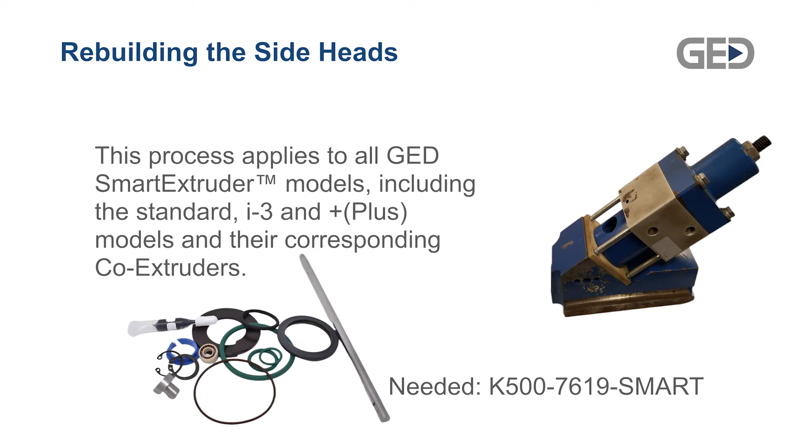Take down the COVID mask.

We're going to go ahead and rebuild the side heads. You're going to want to do this when they're hot. The material is too hard to clean up when it's cold. You're either going to take them right off the extruder and start to rebuild them right away, or have some sort of a mechanism to heat this up, a hot plate or something.

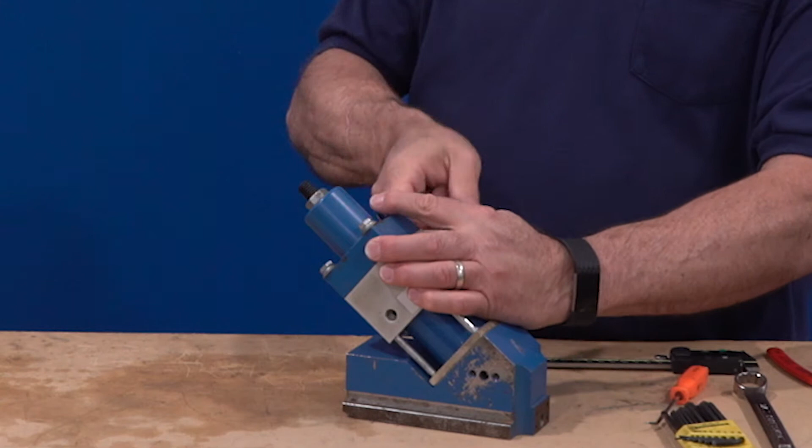It's kind of a hot, messy, sticky job. But when these seals down in here start leaking, and you start getting a ball in there about the size of a grape or a marble, it's time to replace the seals. Of course, keep in mind this is going to be about 200 degrees and hot and sticky. All right, we'll get our 4 corner bolts out.

And we pull the bell housing off. We're going to break loose the jam nut on the bell housing. And we're going to back the stop bolt out. I take it completely out. We're going to pull the air cylinder out, and I'll pull the nozzle adapter out. Just kind of twist and pull.

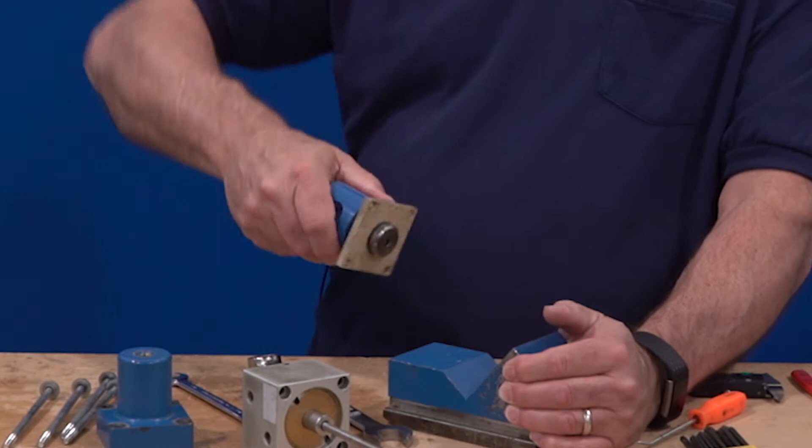When you go to replace the seals in here, it is not necessary every time to do a complete rebuild on the heads. What you could have are just the 6 components that make this up, sitting on the shelf. You could literally do this on the machine, pull this apart just like this, replace the stem seal, and put it back together.

While you have it apart, inspect the end of the stem to make sure there's no damage to it. Over time, it'll start to stick down into the seat. We just want to be careful that we're not getting a ring around here where it is getting stuck in the seat. But these 6 components are the nozzle adapter itself, the insulator, the O-ring, there's a snap ring, stem seal retainer, and stem seal down inside here.

Get the cheater glasses so I can see. That might help things out just a little bit. Yeah, this snap ring's been in and out a few times, seen better days. Used for demonstration purposes.

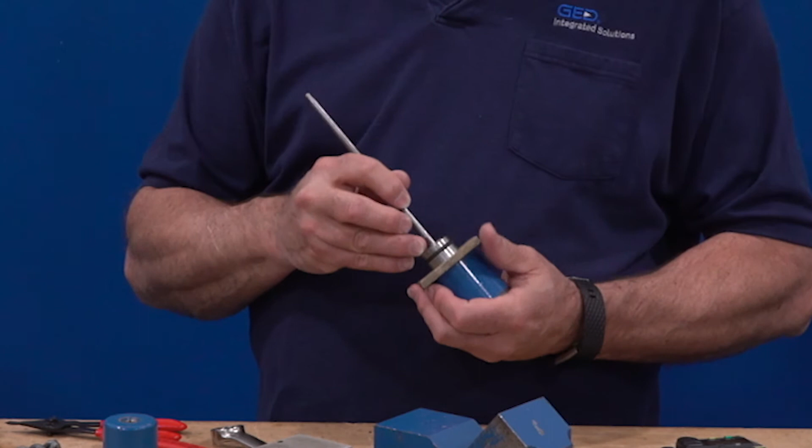Now, your stem seal retainer is not going to just fall out like that. It's going to be packed in there with a bunch of sealant. But it is threaded in here. You can use a standard 5/16 bolt, thread into that, and use a bolt to pull that out. And the stem seal is still in there. I can use an old stem or a brass drift to poke that out.

There's your stem seal. It's a cup seal. When we insert the new one, we want to put the open end in so it's facing the material. That way when the material comes up, it spreads that seal out, seals it off. I've seen guys build this, put them in backwards, and wonder why they're leaking again.

As part of the disassembly there, we also have our seat, which is still in here. So we can take a brass drift, or again, we can use an old stem, and we can tap this down through here. Try to catch it as it comes through. And that's our seat.

The stem goes down into the seat, seals it off. When the air cylinder pulls back, it opens this up and allows material to flow down to the nozzle tips. Over time, these get worn, these get damaged. The stem will stick into the seat. You may notice when it goes to open, one side will open before the other. It could be that that stem is getting stuck in the seat, a little bit hard to pull out, which may indicate that you need to rebuild that.

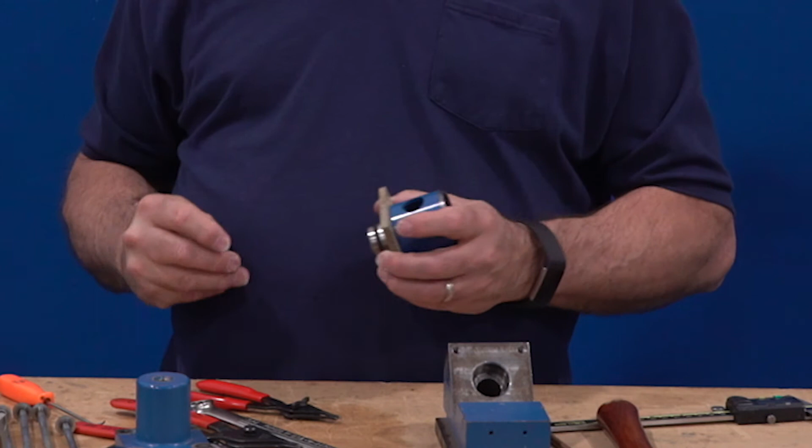Next, we have to put in our new seat. So again, using a pencil, I'll take the new seat. I'm going to put a drop of Loctite on either side, blue Loctite. I'm going to get it pressed into place there. I'm going to use an extension from a 3/8 socket.

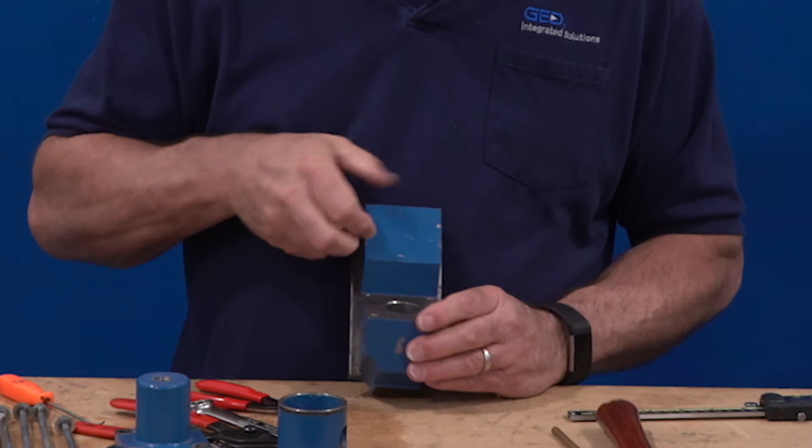That's perfect outside diameter, so I'm not damaging the center of the new seat. And I'm going to tap this down in here. I'm going to listen to the tone, okay? I'll hear it tap, tap, tap, thump when I bottom out. I want to make sure I'm bottomed out all the way.

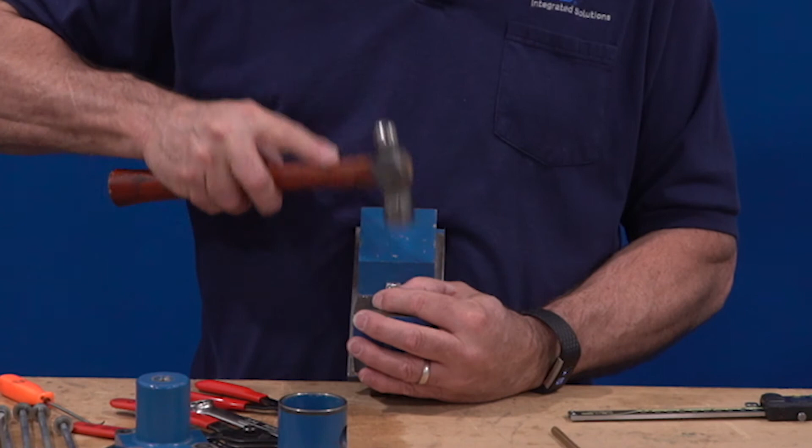And then we can go ahead and take our rebuilt nozzle adapter. Anti-seize around here. And I want the hole facing up.

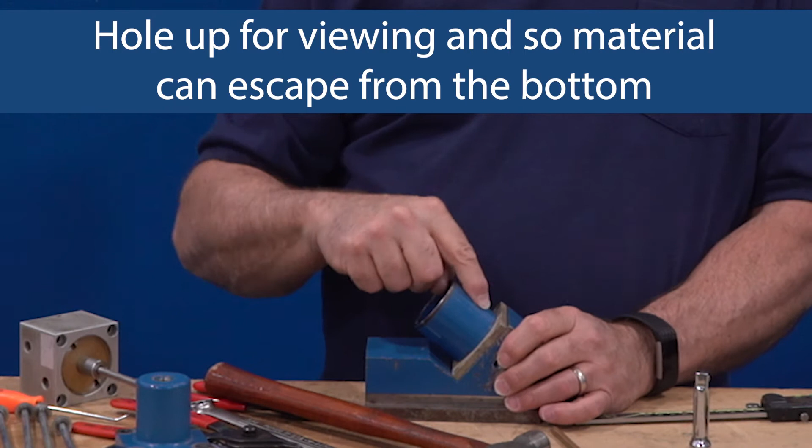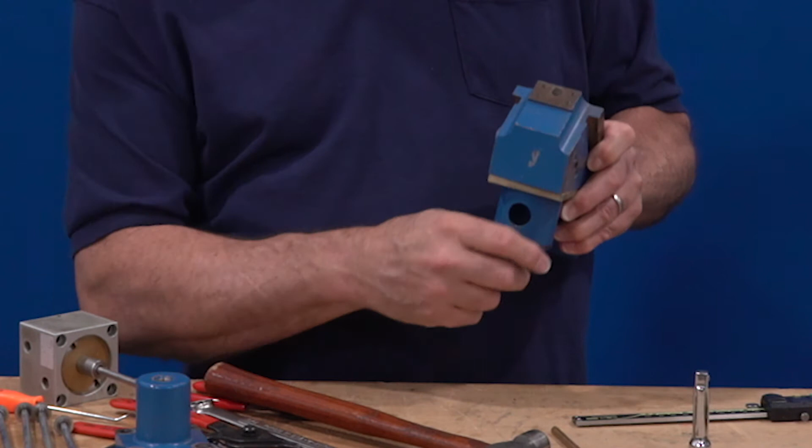The bottom head is very similar. The only difference is this is going to be kind of in a vertical position with a little different style head, but the nozzle adapter is the same. I want the hole facing out. That way I have a sight area. I can view in here and look to see if the seals are leaking.

On the bottom nozzle assembly, gravity is your enemy. Because as that starts to leak, it's going to leak down and set on top of your air cylinder. And as the air cylinder works back and forth, it's going to start to draw that sealant into the air cylinder. And that's going to gum up the air cylinder on the bottom.

More so on the bottom than on the sides. You may have issues where you got to rebuild it because you get butyl up into the air cylinder itself. The air cylinder itself, we want to take this apart. When you get the rebuild kit, these new seals for the air cylinder are included.

So we'll take the set screws out of either side of the piston here. And there's one in the end. Pull the old stem out.

When you put your new stem in, remember we had the set screws that went in against the side of the stem. They go into this flat area. Don't know if you can see that on here, but you do have a little flat. What I want to do is I want to bring the set screws in until they just touch that flat. I don't want to tighten them, but I want to bring them in until they just touch that flat.

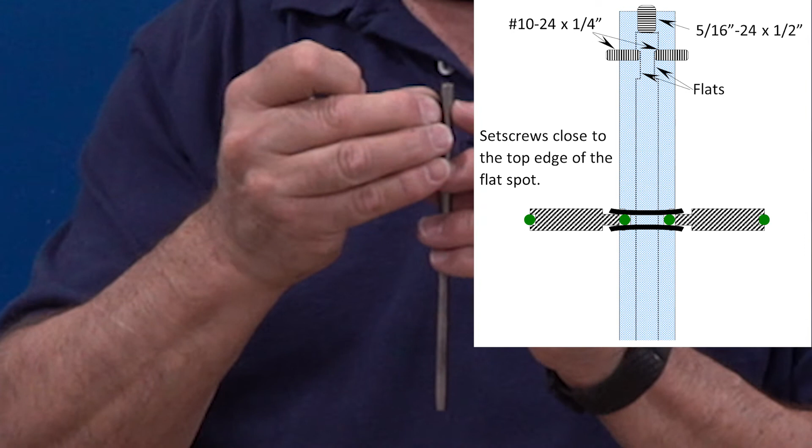Bring them in on each side, and then what I'm going to do is I'm going to bring the screw in from the end and tighten that up so that it slides the screw all the way up to the end of that flat area. It puts all 3 screws into a bind.

The reason that's important is eventually with this opening and closing, one of these screws could work loose. If one of the screws works loose, the other 2 screws will hold it in position. It can't move anywhere. If I'm somewhere in the middle and it loosens up, then this can slide back and forth in that flat area.

And what that will do is it will cause the head to be sluggish opening. The material will have to actually push the stem out of the way, so it'll be very thin at the beginning. Then the shutoff should be pretty good. But you'll see a thinning at the beginning on the sides.

So we'll take our new stem, slide it in here. Again, look to see where the flats are. Blue Loctite on the threads, just a drop. Or green, which is a high temp removable. I'll bring that in until it just touches. And I'll do the same thing on the other side.

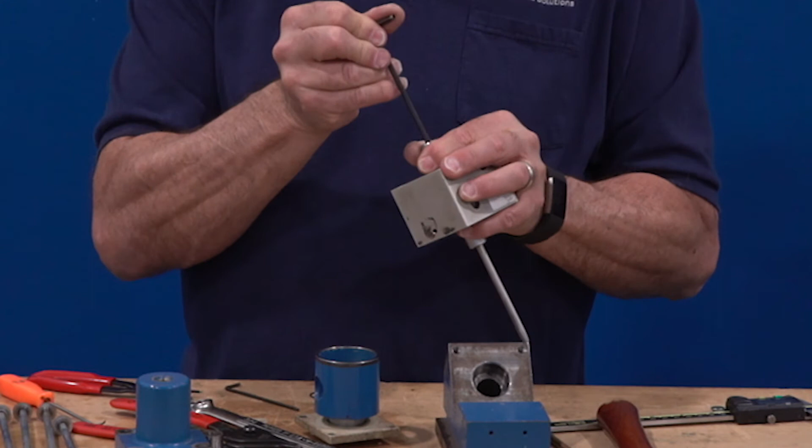Again, set screw on the end, Loctite on the threads. We take this in. I'm going to take this all the way down. And I'm going to tighten that up a little bit until all 3 of these screws are in a bind.

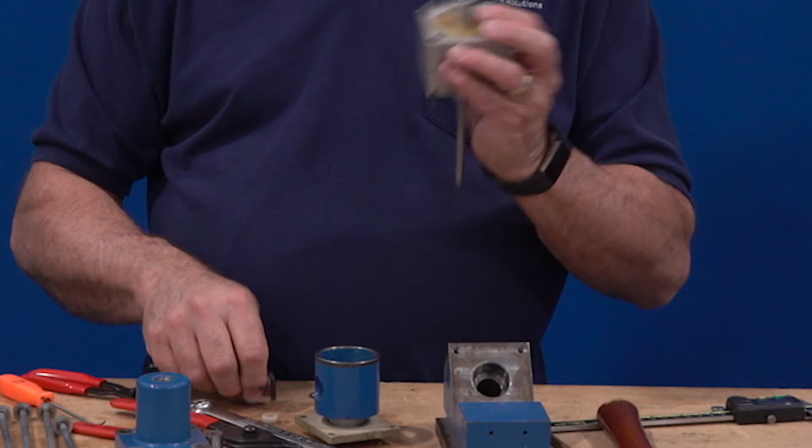Sometimes it helps to hold the piston so it doesn't spin with the other Allen wrench. Now they're tight. I tighten the sides. And tighten the bottom. Or the top, as it is. So that's the proper way of putting the stem back in there.

So again, got a little Vaseline on the seal, a little bit on the stem here when you put this back in. We slide this back in. Orientate the holes so that it's appropriate for the operator side, non-operator side, whichever the airlines are going to. Put our 4 corner bolts in.

If you should break a bolt off or have to replace one, you don't have one that size, you can use a piece of 1/4 inch all thread. Just make sure that it's long enough to go at least 3 or 4 threads into the base and have enough on the top where you can put a nut and a lock washer. Sometimes it'll get you out of a pinch. I think it's like about a 5.5 inch bolt. It's not a real standard size common bolt that you're going to have laying around.

As you tighten these up, tighten them up like the lugs on your wheel if you're replacing the tire. All right. I want to go kind of in a crisscross pattern so that I'm coming down evenly on this. If I'm not coming down evenly on the nozzle adapter, I could have it off at an angle, which could cause the stem to be kind of sluggish opening and closing. Could put it into a bind.